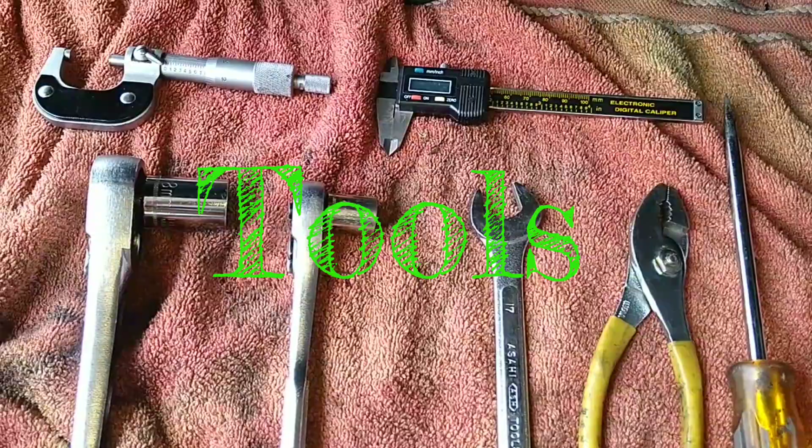So these are the tools that you will need. If you're gonna do it the way I'm doing, you probably don't need these two, but I will show you how to check whether this is still usable or not. So you're gonna need either one of these tools. This is a caliper, and that's a micrometer.

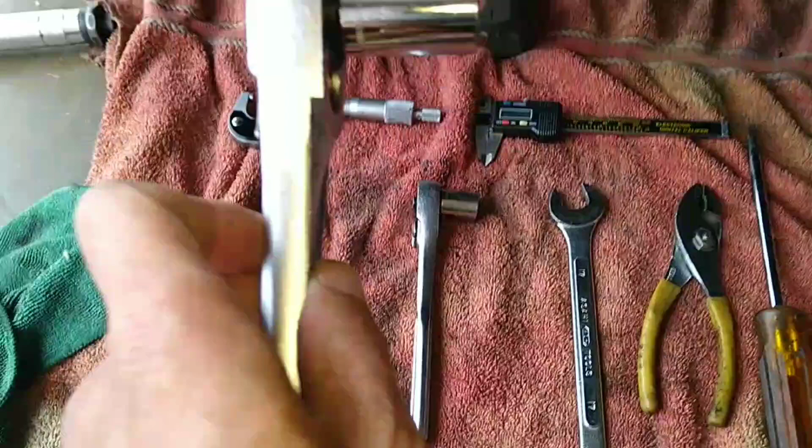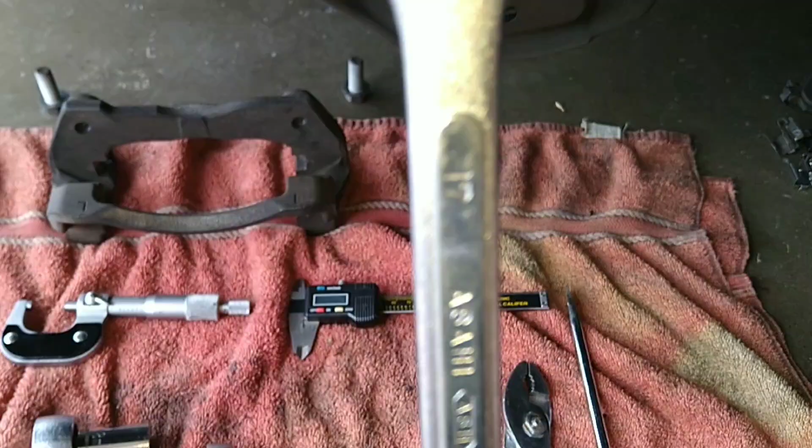So you're gonna need a 1/2-inch ratchet with, I believe, an 18 millimeter socket, 1/2-inch, and a 3/8 ratchet with a 14 millimeter socket, a 17 millimeter wrench for backup, also a little plier and a flathead screwdriver. Also there is another, hold on.

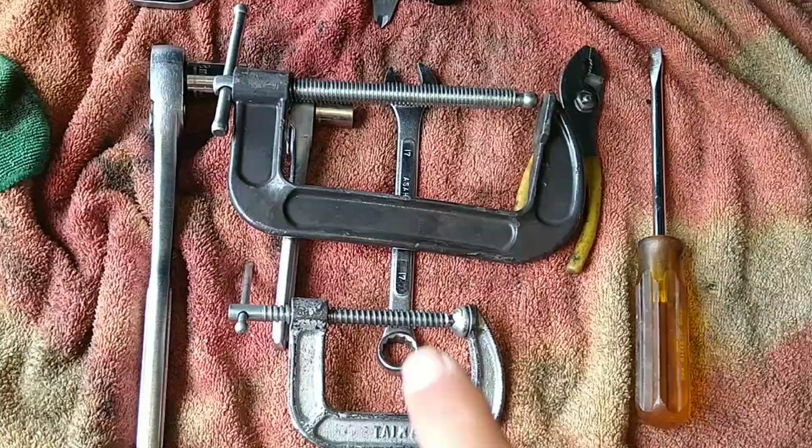So either this or this C-clamp. Sometimes I'll be able to get away with the small one, but sometimes I need the bigger one. All right. These are pretty much all the tools you need to do a brake service, the disc brake in the front of the 2012 Scion XD.

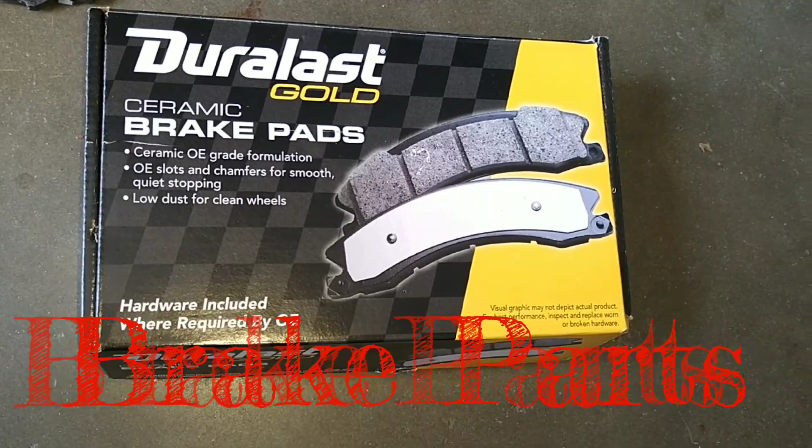So part, you're gonna need this part here. I bought this from AutoZone, and this is the part number if you're gonna buy it from AutoZone. It's a ceramic brake pad, which is a better pad, and some of this lubricant. I will show you where that goes later on.

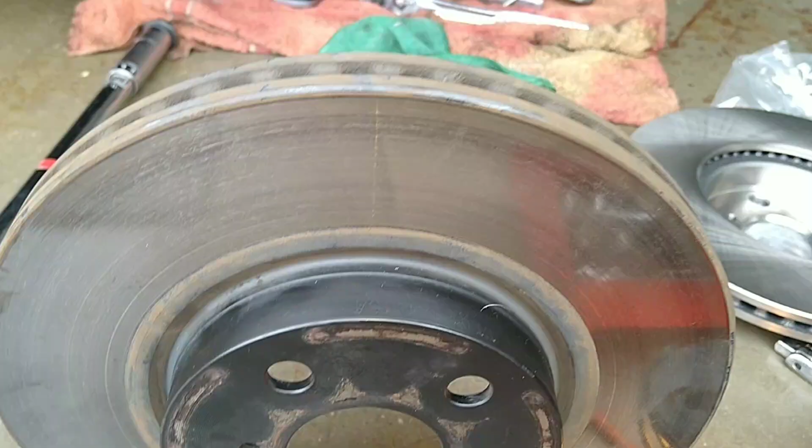And if you're gonna reuse your disc, you have to take it to a machine shop to kind of smooth it out, because after a while they wear out a little bit. Yeah, this is the old disc brake. It's still good. I already measured. I will show you the steps how to measure this with the caliper or the micrometer.

You see right here, there's a little groove, so that's why you need to smooth it out. I will show you a newer one, because on the newer one you will see there is no groove like this right here. So you need to have a machine shop smooth it out all the way from here to the top here.

And there is a minimum thickness requirement in order for you to reuse this disc. And you can see there is some engraving here, minimum thickness 19 millimeter. And I'm going to show you how to use the tool I just showed previously to measure the thickness of this. Thickness is here, all right?

As you can see, this is a brand new disc. And you can see there is no groove here. It's just straight all the way through. So if you're going to buy a brand new disc to replace this, there's no need to remachine the old one. Because I think they charge about $20 nowadays to turn one of these. So two, that'd be $40.

This brand new one is about $70 a piece. I forgot, 70 or 79. So I decided, to speed up the process, I just buy a new one, and then later on I'm gonna have that machined and have it ready to go for next time. That one I replaced 50,000 miles before. So I'm gonna keep using this one instead.

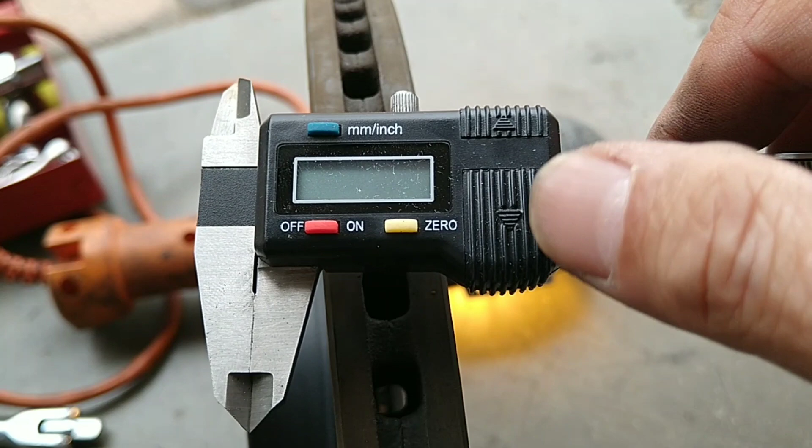Yeah, I bought this from Harbor Freight. I forgot how much it was, probably $20. So the problem with this, if you leave the battery in here, it will drain it. So I usually take the battery out when I don't use it. So to measure the thickness of this disc, all you have to do is turn it on.

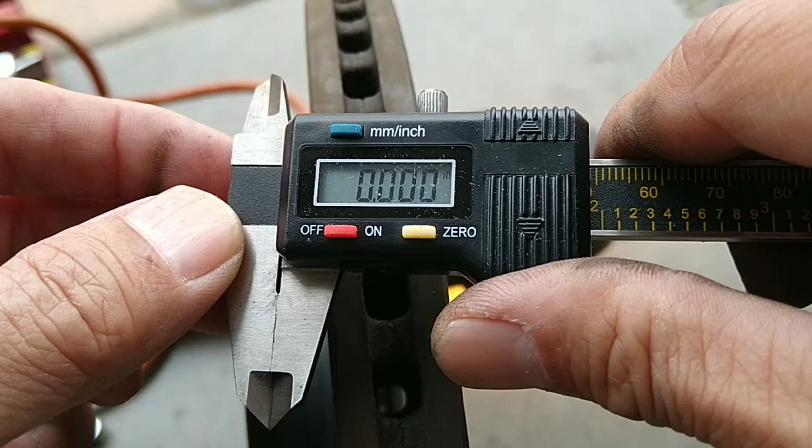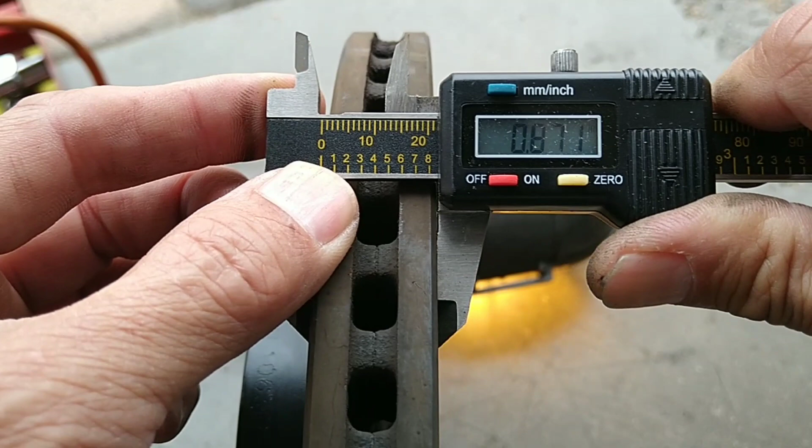Let's see, what did I measure with? So right now it's in inches. So we're gonna do inches first. Point. Not sure you can see it or not. 0.871, right? Yeah, 0.871. So if I move it to millimeter, it's 22 millimeter.

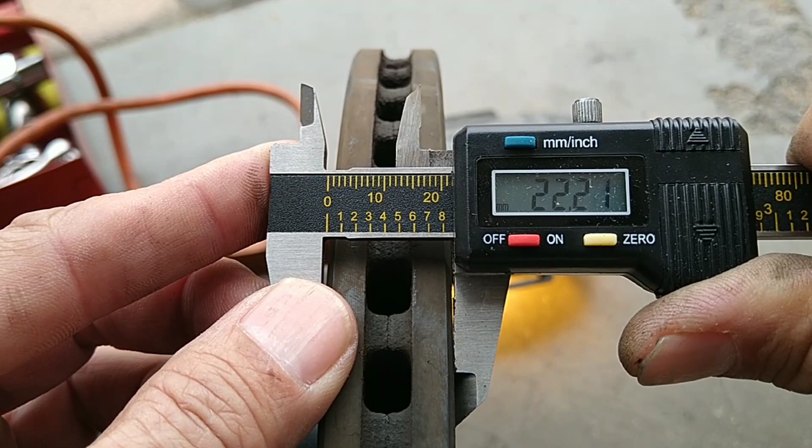So this is still good. Remember the minimum thickness is 19 millimeter. So after you do the machining, you'll be able to shave about 1 millimeter on each side. So it's still good for another 50,000 miles. But let's see. Let me measure with this.

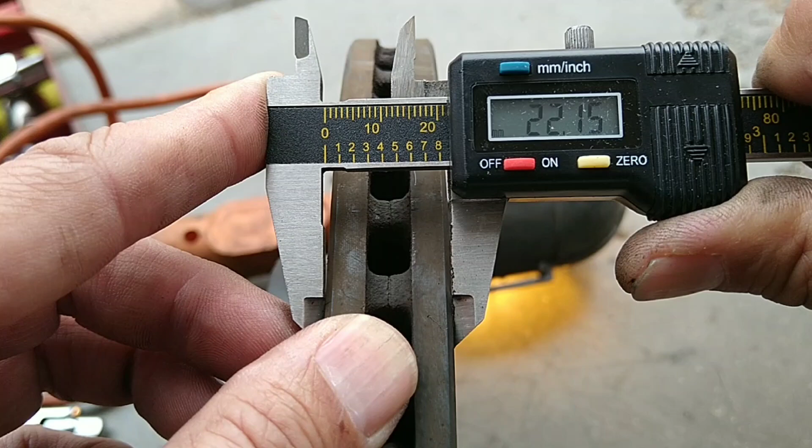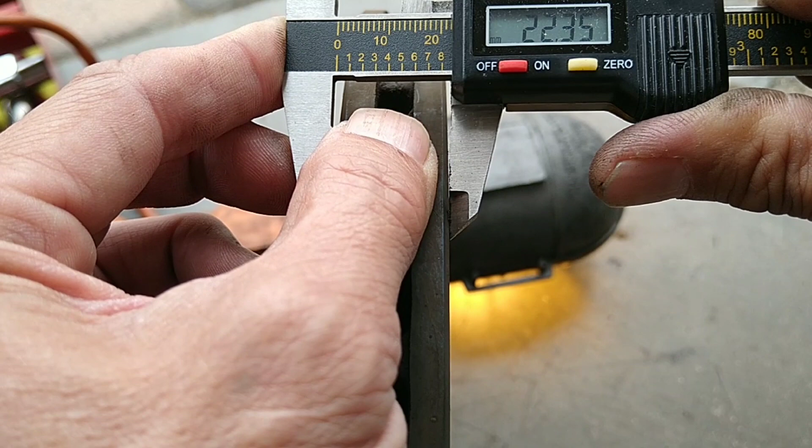See, instead of using the digital readout, you can read it from here too. See, 10, 20, and then two more, right? Yeah, each of those is 1 millimeter. So it's about 22 without using the digital one. And you can see on the bottom it's 0.8 something. That's kind of hard to read.

So we're going to use the micrometer. To measure with a micrometer, unfortunately I only have an inch, not metric, micrometer. So we're going to use it, and then we convert it. So right now this is a 1 inch micrometer. So you're going to see how it goes.

1, 2, 3, 4, 5, 6, 7, 8. And each of those small ones is 25, so 8. So for every number, there's 4 of them. So each slide is 25. It might confuse you, but it's pretty easy to figure out. See right now, 25, 50.

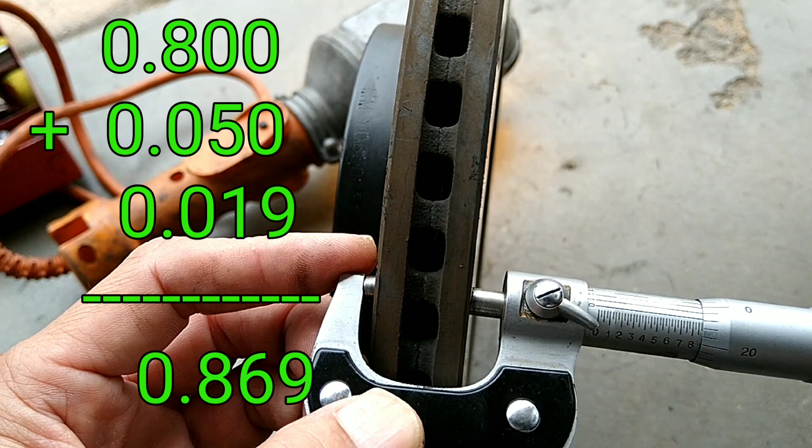See how it goes 20, 25 to 0. 0 is pretty much the same as 25. So 24, 23, so we can go back. So right now at about 0.019. See, remember 50? No, 0.850, 0.869, right? 0.869. All right, let's double check with the digital one.

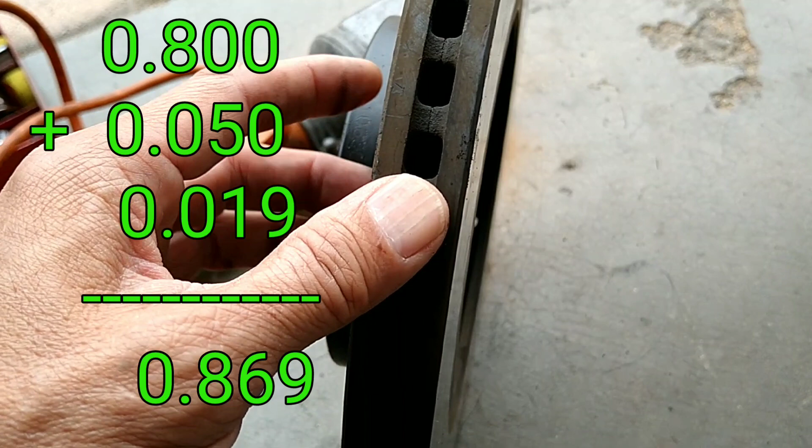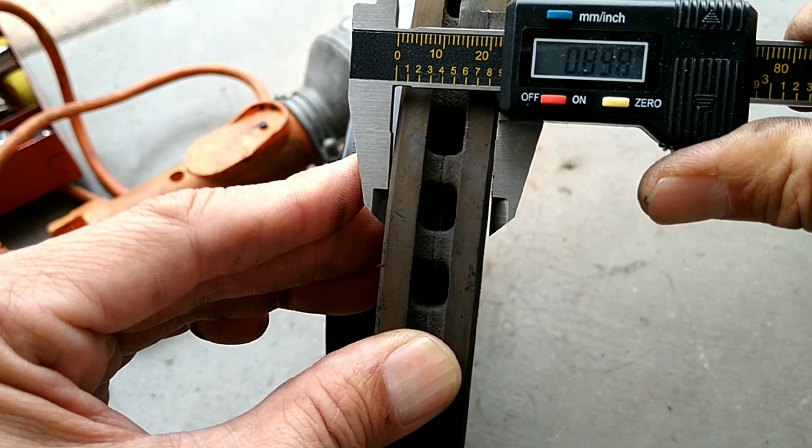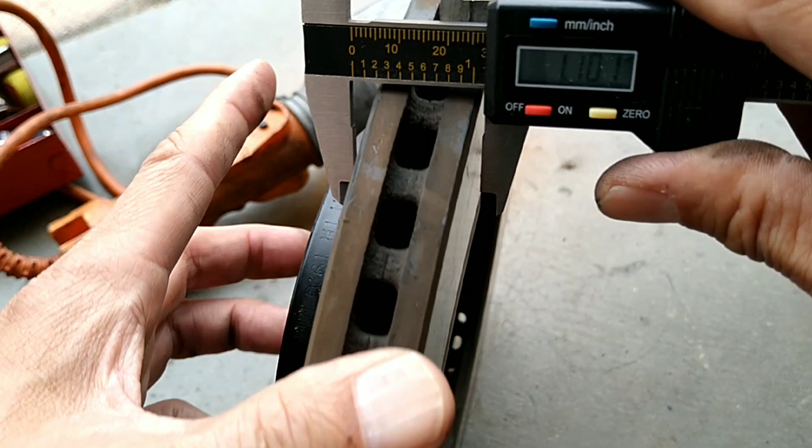See, digital one is 0.89. See, 0.8. You gotta be careful when you do this. It has to sit right, or it will give you a wrong reading. 0.875. Remember, you talk thousandths of an inch, right? The third number is thousandths, and the second number is hundredths of an inch. Pretty close. And that is how you read the thickness of, remember this is 19.

Let me switch to millimeter here. 22, so it's still good. This is conversion right here. That's in inches, 0.874 inches. In millimeter is 22 point something millimeter. So this old one is still good, so I'm going to save it for the next time. Remember, you got to zero this. See, right now it's 0 before you start doing anything, right?

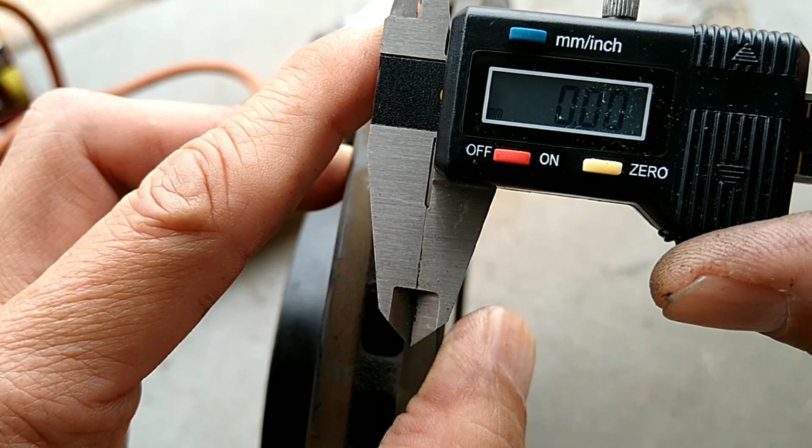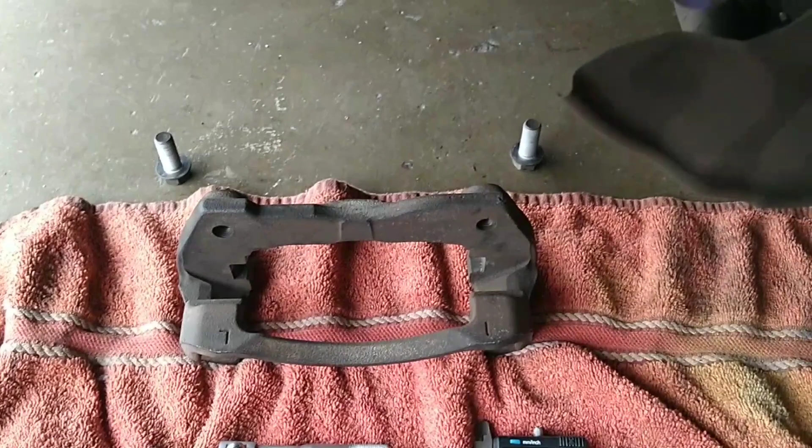Okay, this is what it looks like after you remove everything. This is just down to nothing, all right? So this part is the one that attached to this right here. I will show you a time lapse of how to remove all this just to save the process. But right now, I like to lay things out like this, so you remember how it goes back together. So these two screws, I believe it's 18 millimeter, and that's the bracket to hold the.

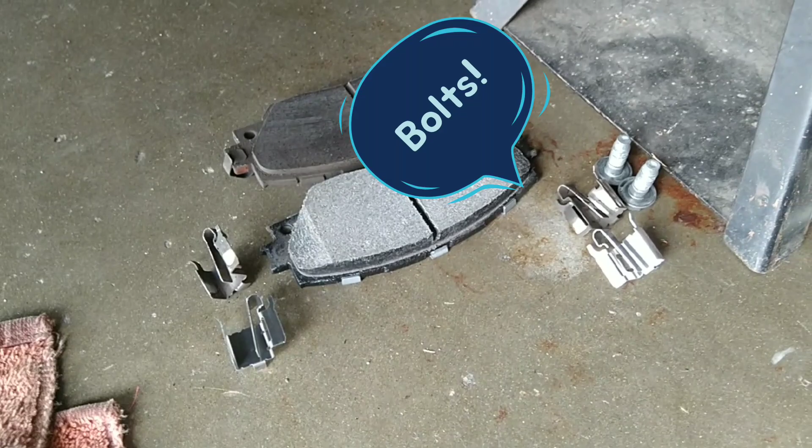Actually, there's a caliper right. The brake caliper is right here. So remember that tool, the C-clamp. You're gonna need the C-clamp to push this piston down in order to put the new brake pad in, and that is held by two of these bolts right there. And you can see I laid out an old one and a new one. See, that's the one inside. This is the one outside. So I like to lay the thing out.

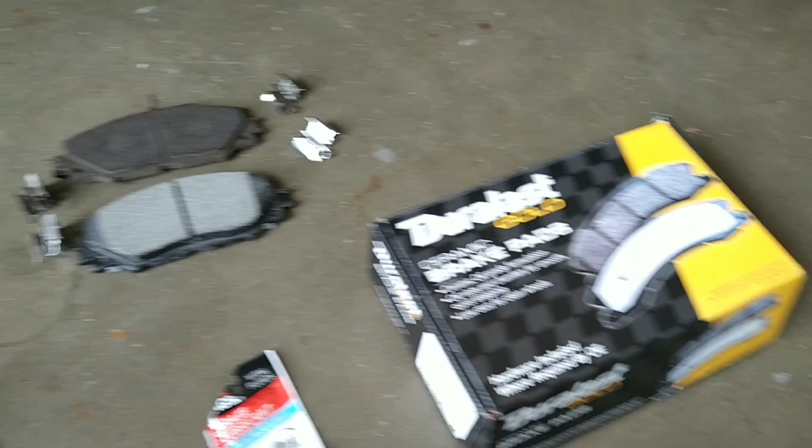See how I have all these new little clips for the brake pad to slide on. They wear out, so I lay them out so that way I can match with the new hardware that comes in the box right here. All right. So all the hardware coming out. And you can see I put it.

Oh, by the way, disclaimer. This is an instructional video. Practice at your own risk. All right.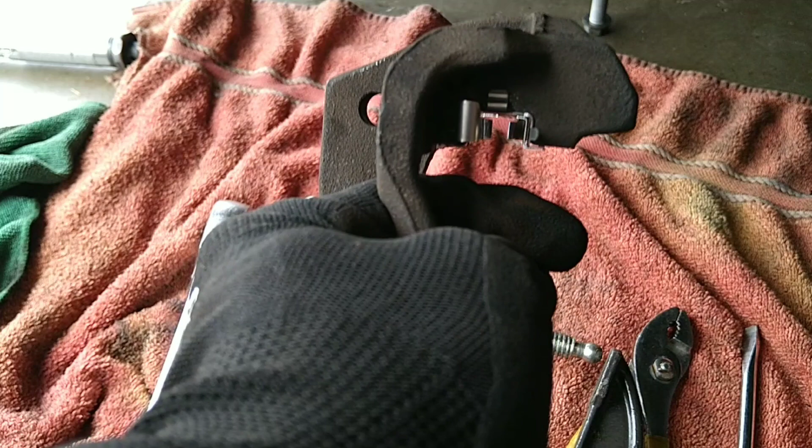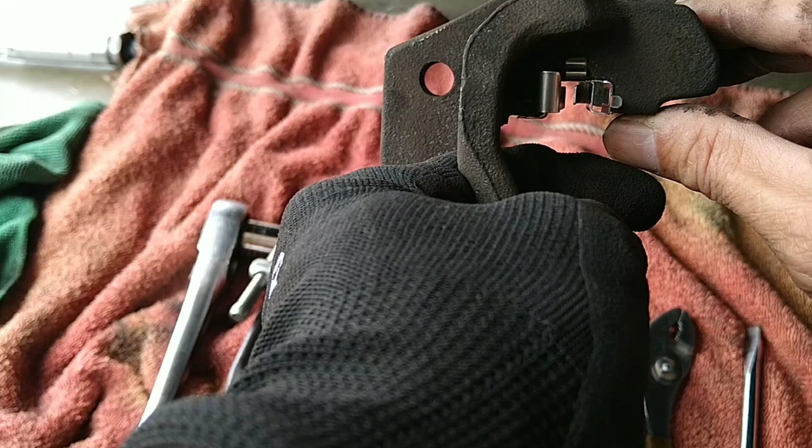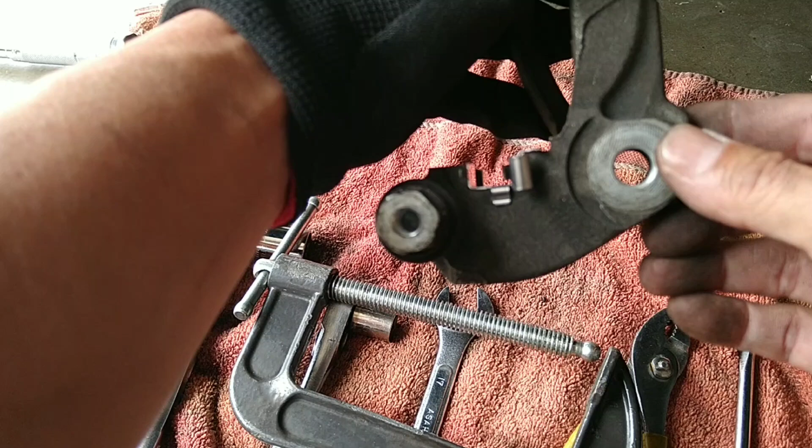This is what it all comes down to. So when you install this clip, be very mindful. There are two types. See how it sits flush? I'm going to show you when I install the wrong clip on the wrong side. See that little gap right there? That's the wrong clip. It should have a clip that sits like this, all flush. So be mindful. Put the right clip in the right place.

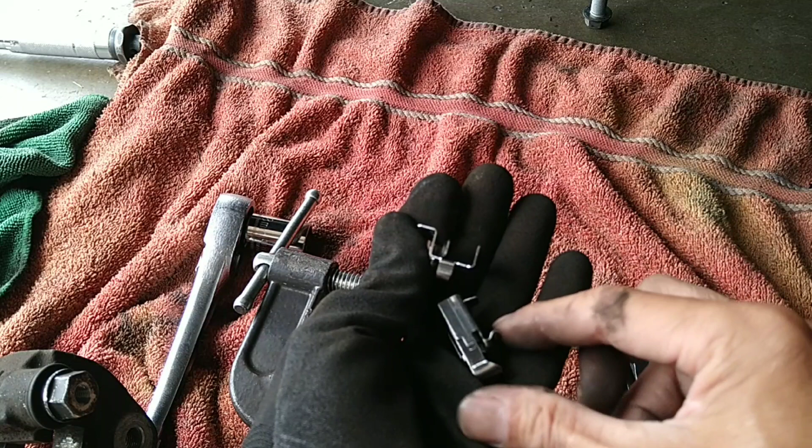Yeah, don't put it like this. That's bad. See that gap? That's not the right clip. Let me get the right clip, put it in and show you. So you can see there's 4 of these. This side is a little bit higher than that side. See how this is a little bit even. So be mindful about that. This is more even across. This is a little bit higher. All right.

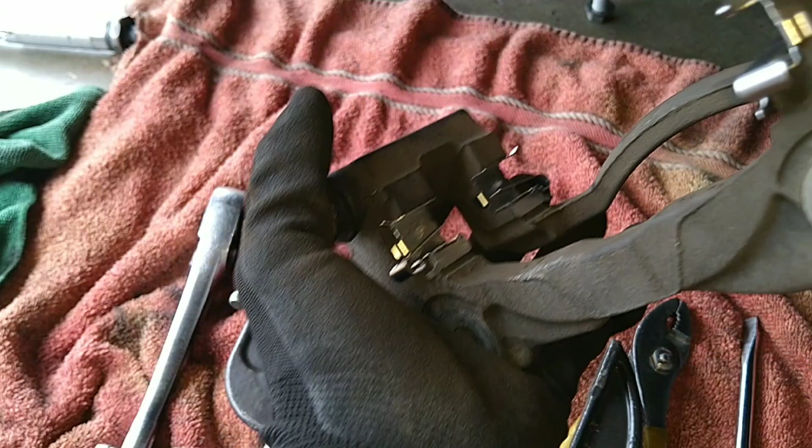Yeah, this is a very crucial part right here. Make sure everything is flush. See, that's flush. This one, flush. See the bottom here, flush. Same thing on this side. There should be no gap whatsoever. Also, I put a dab of grease in that little pocket here, so that way the end of this pad will glide easier on it. All right, let's install this.

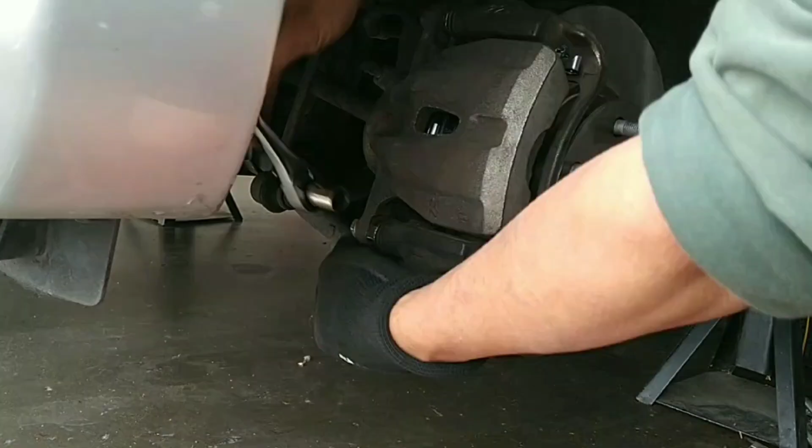Okay, so I installed everything. I'm gonna go pump the brake and watch the caliper. It's gonna push the brake pad against the new disc. So I pumped about 3 times, and right now you can see it push. See, the piston came out a little bit and it pushes the brake pad against the disc.

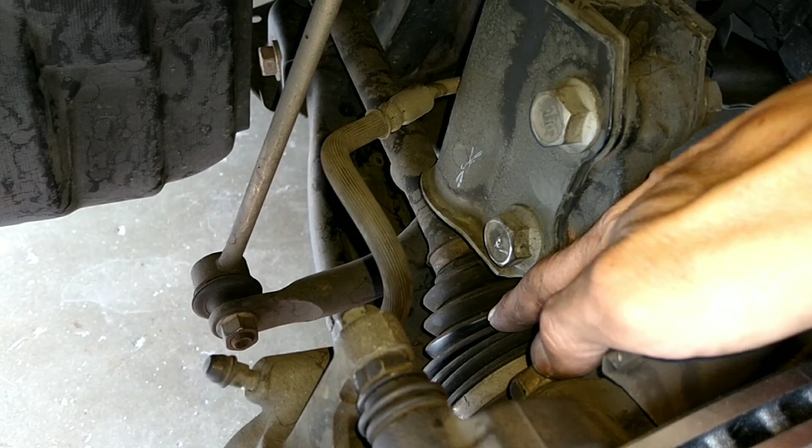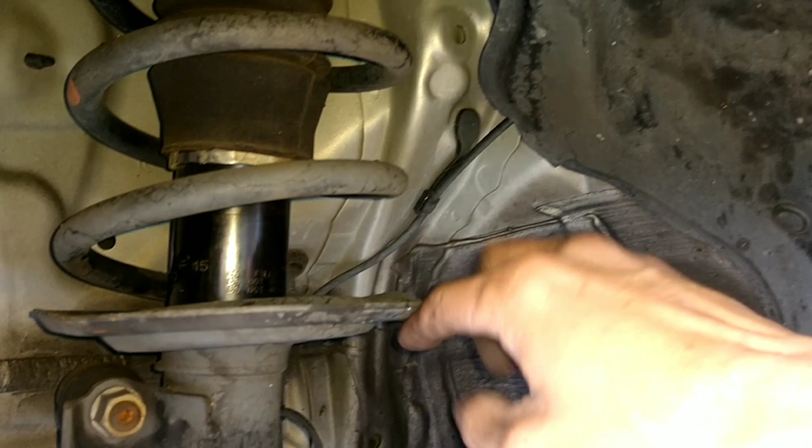So since you already opened up this side, I check on the boot, make sure nothing is broken. Kind of look over the boot back there, make sure there's no grease. Kind of look all over the shocks and struts, see any oil. Right now it's nice and clean, no oil, so the strut is still good. Then just put the wheel back on.